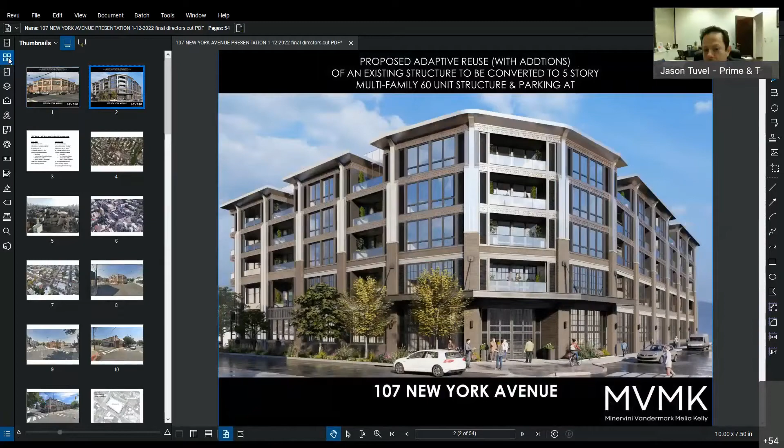There you go, Anthony. So before you, we are proposing a 5-story, 58 feet 10-inch high structure. We're proposing 60 residential units.

What you see here before you is the corner perspective of the warehouse that I had just previously shown you. The 2-story portion is going to remain. However, we are renovating it and providing a 3-story addition on top of the existing warehouse structure. The 1-story portion of the structure that I previously mentioned to the south will be demolished, and there will be a 5-story addition put back in its place, thus connecting the construction to look like one uniform structure.

So what are the differences between the two projects?

In June 2020, as Jason had previously mentioned, we presented 75 residential units. This evening, we are presenting 60 residential units. The original application had an affordable contribution for off-site housing at $450,000. That is no longer the case. We are proposing 10%, or 6 units, of affordable housing on-site, which falls in line with the inclusionary zoning ordinance that was just recently passed.

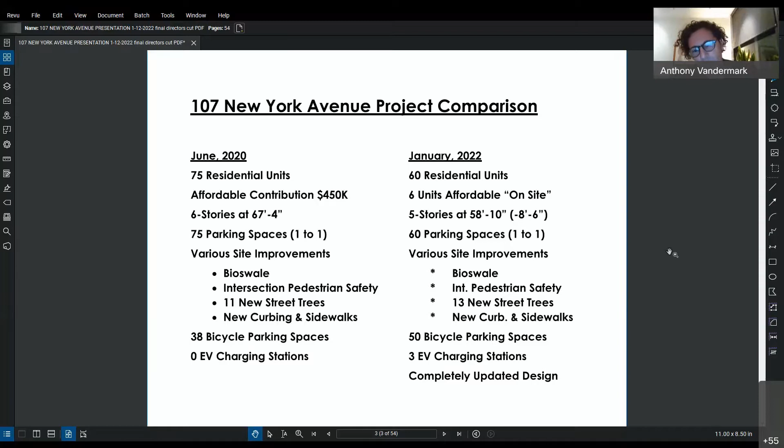And as you can see from the previous slide, we have a brand new, updated design that is pretty far apart from what the original proposal was.

The existing site is a full city block. It is 23,625 square feet, so it's a little bit over half an acre in size.

To the east, you can see my cursor here, we have New York Avenue with 140 feet of linear frontage. To the south, we have Ravine Avenue at 203 linear feet of frontage. To the west, Webster Avenue has 107 feet of linear frontage. And to the north, Ferry Street has 182 feet of linear frontage.

So the site is large. It has a definite great impact on the neighborhood. The diagonal connection street is New York Avenue, which runs down to Hoboken.

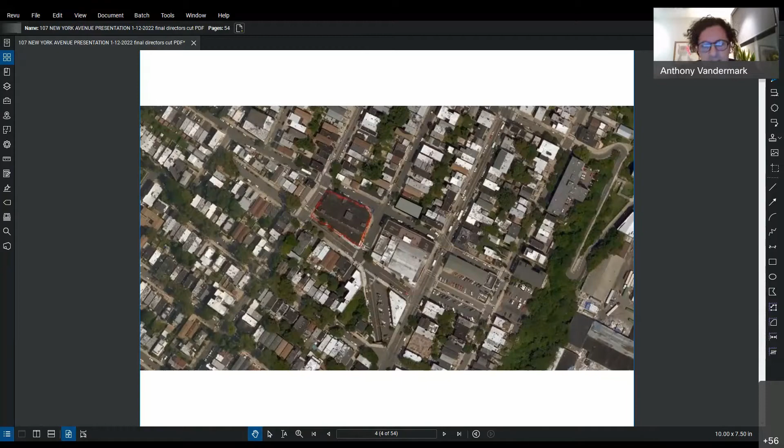This is an aerial drone shot taken this morning, as a matter of fact. The existing building directly in the center of the photograph, between the building structure itself and the remaining property on the sidewalk, is at 100% impervious.

What we're proposing tonight is a substantial stormwater detention system with a large amount of extensive green roof, also followed by the bioswales at the sidewalk level.

Some of the existing structures in the neighborhood of note: here in the foreground, you have a 3-story residential structure, which is the tan color. Directly across the street at Ferry Street, we have a 3-story and a 2-story residential structure, followed by a 1-story garage structure. Directly across the street from that on New York Avenue is the under-construction 122, 124 New York Avenue. That structure itself is at 5 stories in height and approximately 56 feet 8 inches.

So our new structure, that structure, and the trolley house lofts directly across the street will align with each other in height. To the south of trolley house lofts, you have the Supremo supermarket. And then again, in the foreground here, you have Ravine Avenue, and we'll talk a little bit about those structures.

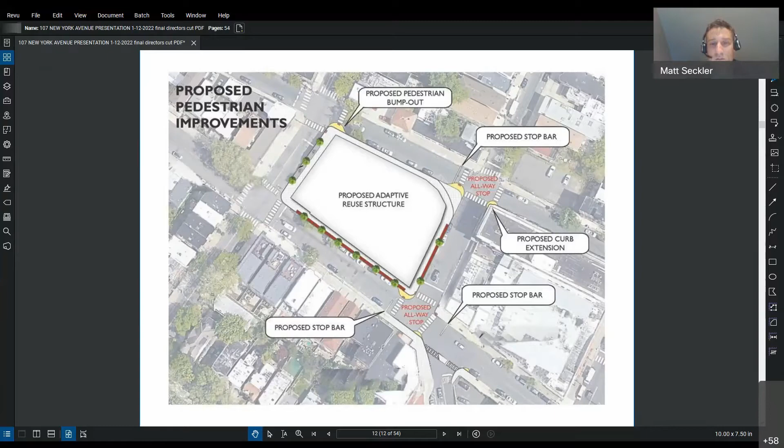The first slide here summarizes, looking at this from an aerial point of view, some of the improvements that we had previously suggested at this site during the earlier applications, and some improvements that I think would be useful that we've discussed with city staff in the past.

They include a series of pedestrian bump outs. These are what you see in yellow at a number of the corners around the project site. What this does is not only decrease the amount of distance that a pedestrian is in the roadway itself, but also provides better visibility for both the pedestrian and the motor vehicle when someone does want to cross the street. It gets them beyond the location of a parked vehicle.

So again, they get a better view of traveling cars, and cars have a better view of them, reducing the crossing distance and the amount of time they're actually in the roadway itself. We are proposing them at a number of intersections, located here at basically 3 of the corners, these bump outs being proposed.

In addition, we discussed in the past with city staff converting 2 of the intersections along New York Avenue into all-way stop conditions. Both of these intersections, the one at Ravine and the one at Ferry, currently suffer from some line of sight restrictions due to buildings built basically on the setback line. By creating an all-way stop condition, it creates better pedestrian safety as cars are no longer zipping through the area, driving over the crosswalks when a pedestrian may be looking to cross.

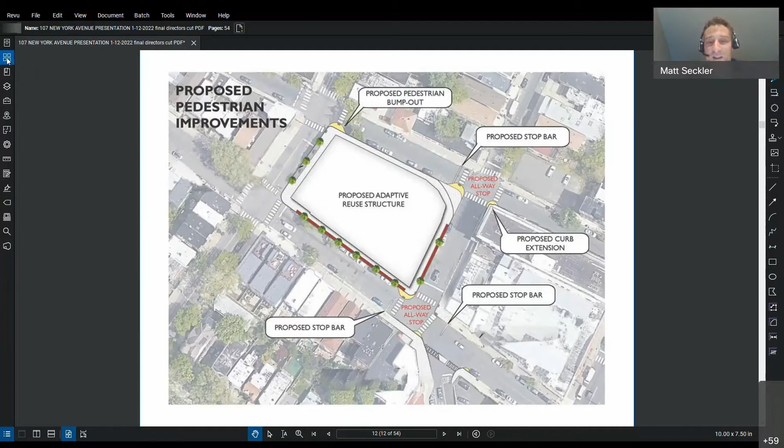I do see a comment there before about the number of trees. Anthony will show you the more detailed vision, which has, I believe, all 13 trees that he had promised on the earlier slide.

The next slide might be a comparison of the traffic impacts of a site such as this type of development. What we've done is a compare-contrast of a kind of fully operational warehouse of this size, and looked at the number of vehicles you would typically have for a warehouse, if the investment was made to operate it at normal, typical conditions. You could see the extent of vehicles, meaning likely employees or customers coming by the site, as well as the number of potential box trucks or tractor trailers that would utilize a site such as this.

I think anyone who's driven through the neighborhood at a time when the loading docks, especially on Webster, are being utilized, understands the significant traffic disruption they cause in order to access the loading docks. Clearly, a warehouse in an urban city center like Jersey City, in this area of the Heights, creates a significant amount of congestion as it relates to trying to utilize this site for tractor trailers or even box trucks.

From a proposed development perspective, we looked at what the trip generation would be for a 60-unit building. Typically, what you see during your busiest hours is a trip generation of about 18 vehicles in the morning peak hour - that's one car every 3 minutes being generated by this site. These values don't take into account the specific area of Jersey City this is located in, where there may be a further reduction of those trip generation values due to the availability of mass transit.

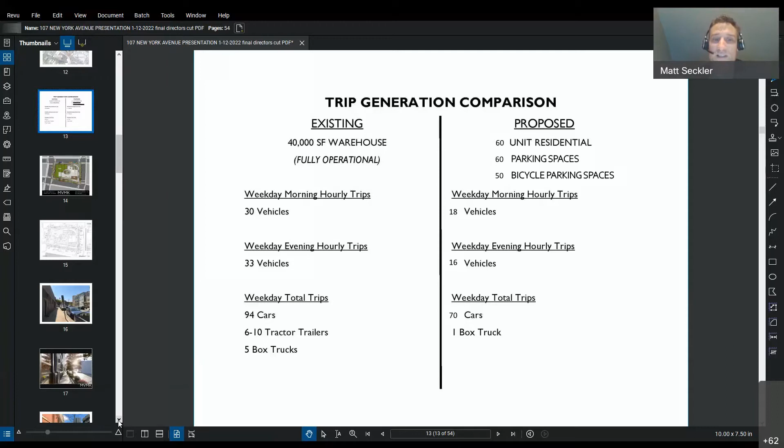Okay, and in terms of the number of parked cars on the street by the site, we're not going to be decreasing the amount of on-street spaces as a result of the construction, correct? Correct. In fact, as Anthony mentioned, there are a number of loading docks located along the Ravine side of the building, which would be able to be converted into parking spaces.

Obviously, we are removing parking spaces on the Ferry side in order to create our driveway. It'll likely be a net wash, or perhaps one extra space will be on the street than exists today, just based on how the site lays out. In addition, we are removing the very large curved curb along the Ferry Street, New York Avenue intersection, and actually creating more of a 90-degree angle helps increase the number of parking spaces along that spot. So it's either a net even or a plus one from the parking perspective.

Okay, and Jocelyn, I'm just trying to make sure I can hit every question. Somebody asked - I think what's probably going to happen is, because they're coming in kind of hot and heavy here. Yeah, I'm just trying to answer as many as we can.

In terms of the question, has there been an independent traffic study done as well? Matt, what would happen is, here we're on a county road and also a city road. We would submit our traffic report to those professionals, the city's professionals and the county's professionals. They would review our data, our report, our methodologies, and then if they wanted to conduct their own or ask us to clarify some things, they would ask us to do that, correct?

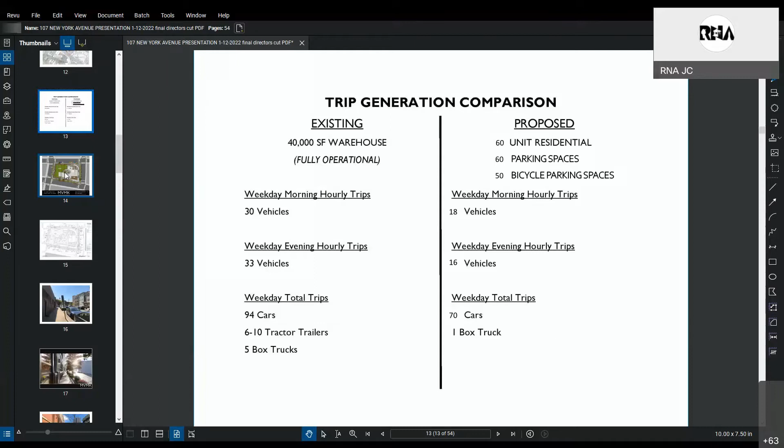Yeah, so what I was stating before is typically, and this is a state standard, you have to study something if it creates 100 trips. 100 trips doesn't automatically mean the road fails - it means it needs to be investigated. As part of this project, we actually studied the 4 intersections on our corners, so all adjoining intersections to us, we did study.

As Mr. Tuvel mentioned earlier, what we do as part of the planning board or zoning board process is when we submit these reports, the city reviewing engineer typically looks at it and says, this project's coming online, this project is still a later phase. They would provide us with additional information if it's not in our report already, and then we would have to revise our report to account for that additional traffic.

So I don't want it to be thought that once you hit 100 trips, every road in Jersey City collapses and needs to be widened. It's that at 100 trips, it creates an intersection worthy of being studied. That study may conclude there's enough capacity, it may conclude that timing needs to change, it may conclude that a traffic demand management plan should be put in effect - something that requires more investment in shuttle infrastructure, busing, biking, and things like that.

That's typically the way the city and the county have been looking at this area. So I hope that answers and clears up that question, and I'm sure there'll be plenty more. So I'm not going anywhere, and I think Anthony's got hopefully some pretty pictures to show.

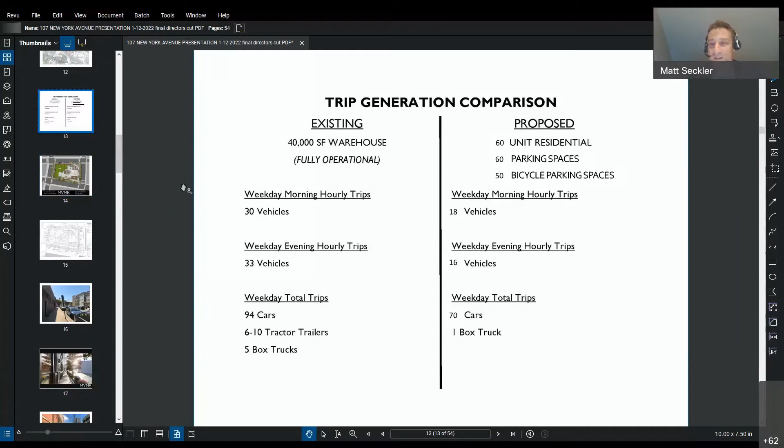Okay, let's continue. Thank you, Jocelyn. So Anthony, you want to go back to your plans? Yes, thank you very much, Jason.

Before you have a colored site plan now, and just to kind of piggyback what Matt was talking about, we have the various corner and pedestrian street improvements here. We are proposing all new concrete curbing and all new sidewalks around the perimeter of the building. Again, as previously stated, we have 13 new street trees.

We're going to try to maintain the existing 4, which is in the darker green color here. Each one of those tree planter beds, in conformance with the Jersey City forestry standard, we will kind of interconnect bioswales, which is like a rain garden. And I have some pictures of what a rain garden would look like a few slides down.

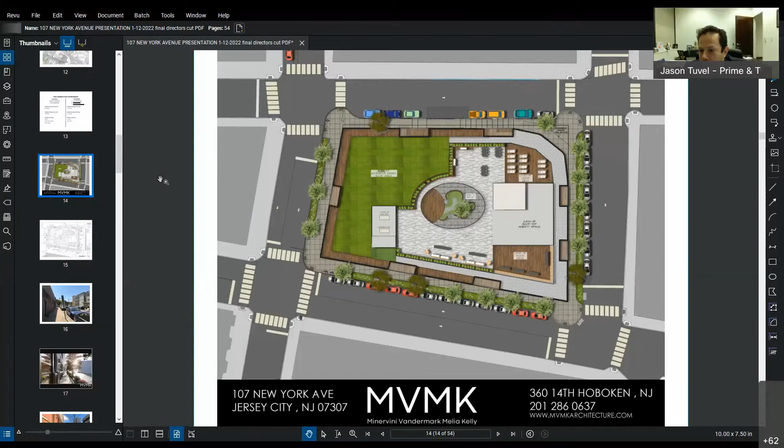As you work your way into the building now - Anthony, somebody asked, can you just zoom in your slides a little bit more so people can see? Sure, yeah. How's this? Yeah, better. Just so people can see a little more.

Okay, so working your way into the building, we're going to maintain the existing lot coverage at 96.4%, and that is 22,786 square feet of floor plan area here.

As you can see, the proposal for the new building has a center courtyard, approximately 1,500 square feet. On the left side of the upper roof, you can see 5,200 square feet of extensive green roof, equivalent to 22% of the overall site area. That's a substantial amount of green roof, one of the green elements we're proposing as part of this project.

That goes hand in hand with the stormwater detention system that Matt had previously mentioned. Also on the upper deck, we have some outdoor area with gray pedestrian pavers at 4,170 square feet. We have a small rooftop amenity space at 2,400 square feet, flanked by a 1,020 and a 1,000 square foot wood deck on the upper roof.

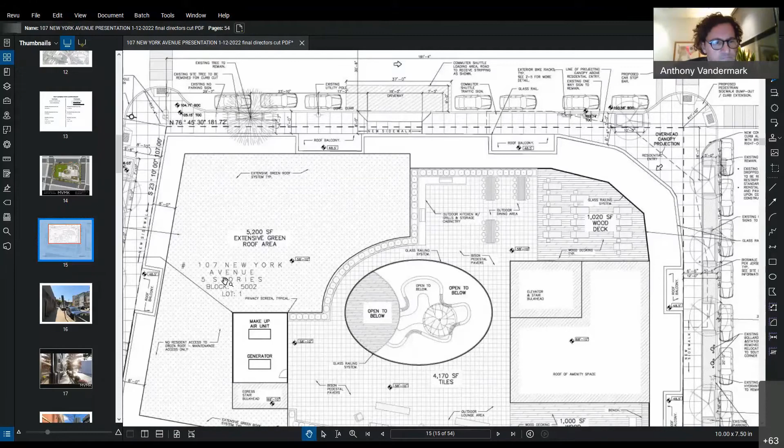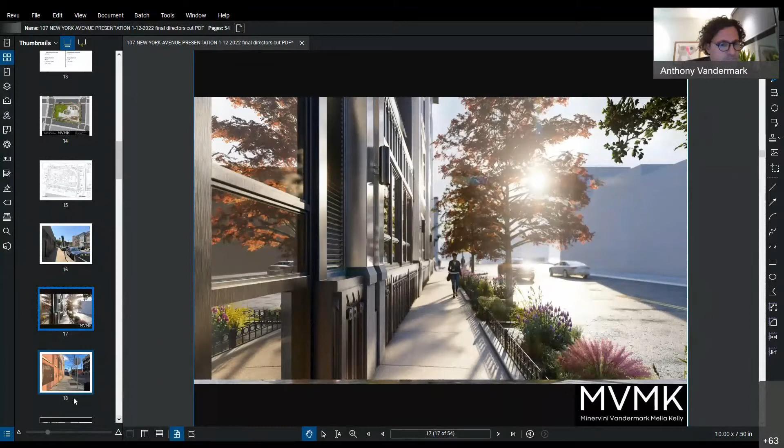This is the sidewalk at New York Avenue with the Trolley House Lofts located to the right side of the photograph, and new multifamily construction directly across the street. Looking at the street and sidewalk improvement here, there's a bioswale rainwater garden on the right-hand side, followed by the 5-story portion of the building where the existing warehouse was. We can get a look at some of the materials being proposed: a patinaed copper aluminum composite panel as the horizontal element, and wrapping the existing warehouse structure, brick masonry in the background.

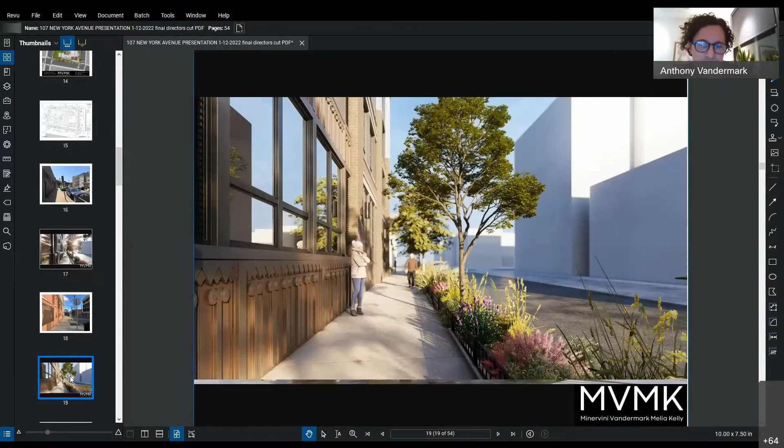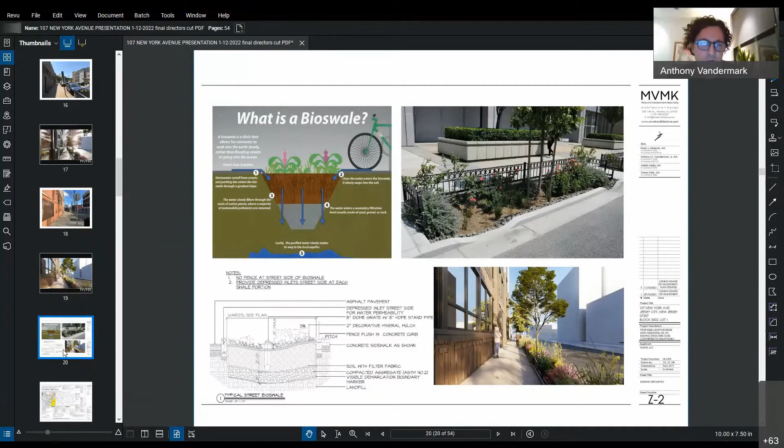What is a bioswale system? As you can see, it's a rainwater collection system that will take rainwater from the street and sidewalk, slowly dissipate it into the soil to a drainage system, and then slowly release it back out to the municipal storm system. This is another method of stormwater management that's not technically on our property, however the owner is committed to doing these sidewalk and street improvements for the neighborhood.

Anthony, I'm going to interrupt here for a minute because several people are asking who's going to actually maintain these bioswales, because it's wonderful to put them in, but if nobody maintains them, it kind of defeats the whole purpose. So who's going to be responsible to actually maintain them to make sure they function the way they're supposed to?

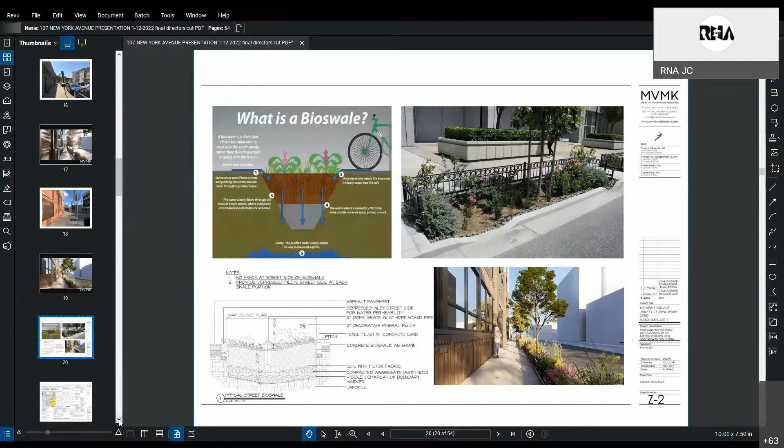This will be a management company, maintenance, the management company for the building, 107 New York, whether it being apartment and or condominium, it will be maintained by the management of the building.

Yeah, Jocelyn, I could also answer that from a legal perspective. Anthony's absolutely right, and also, because these are on the street, at least the landscaping proposed on the street, we're going to have to bond for these with the city. So we'll have to provide a maintenance bond for these, first a performance guarantee to ensure they get installed the way they're on the plans. Then after they're installed, we also have to have a maintenance guarantee for 2 years after that, where the city is able to hold a bond to make sure they stay the way they were installed. Besides that, if the city approves the project, the landscaping plan and all the plans we propose, whatever trees are there, whatever landscaping is there, all these details that Anthony is showing, those approvals run with the land, and the applicant or owner or management company are legally bound to preserve them and maintain them in the exact form that they're on the plans. I just wanted to make sure everyone understood that as well.

As from a stormwater perspective, as opposed to if the city was making improvements like they have in other areas, beautifying streets and putting these in, they don't necessarily belong to anyone's site plan. So that's when they typically fall into further disrepair, because it's on the city to come around and maintain it when they can. When it's on a site plan, having worked on a number of projects like this, whoever received the approval, or whoever ends up taking the property, that's who has to maintain it. So it's not an orphaned bioswale like you may have if the city does it on their own.

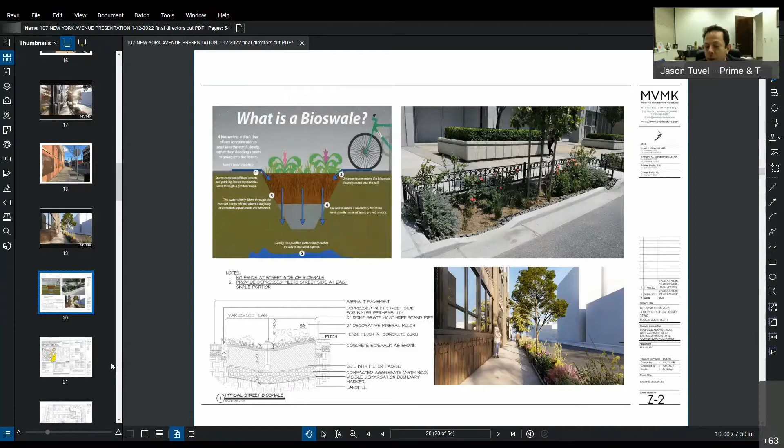Now I'm going to take you inside the building to the actual application drawings. As previously stated, we are proposing a 5-story, 58-foot 10-inch structure with 60 residential units. Of the 60 residential units, we have 24 one-bedrooms, 32 two-bedrooms, and 4 three-bedrooms.

Including this proposal, we have 50 bicycle parking spaces with 60 car parking spaces. Of the 60, we have 36 mechanical spaces, 21 standard spaces, 3 of which are electric vehicle stations, and 3 ADA parking spaces.

We are proposing a lot coverage of 96.4%, which matches the existing structure, and we are maintaining the 1'10" setback at Ferry Street. The upper floors, as part of this proposal, are at 90%. We have a center courtyard, as previously stated, at 21,326 square feet. So those are the general parameters of the project.

Taking you within the building footprint, here we have the proposed first floor plan. The residential entry and main lobby will be at the intersection and pedestrian bump-out of New York Avenue and Ferry Street. Centrally located, we have the garage entry from Ferry Street, proposing a 19-foot wide curb cut, since we're utilizing the existing structure of the first 2 floors, and you can see the circular column grid within the parking garage.

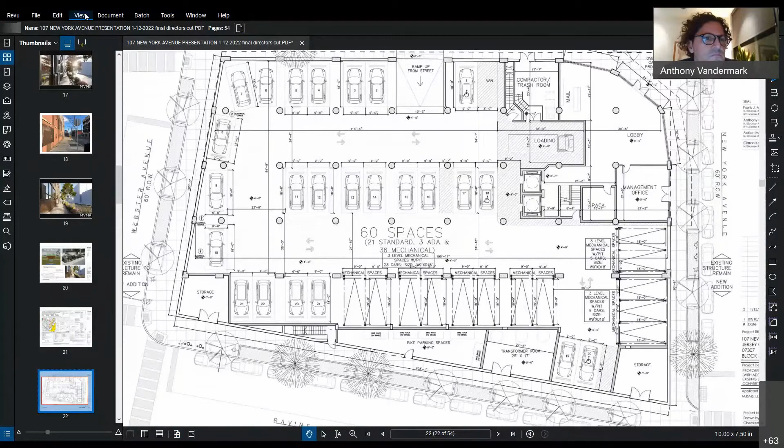Somebody asked about whether the parking is on the inside. All 60 parking spaces are on the inside of the structure, correct. There is no street parking as part of this proposal, as well as the bicycle storage.

This is a 3-dimensional rendering of the residential entry at the intersection of New York Avenue and Ferry Street. We have wrapped the existing concrete warehouse structure with nominal brick masonry. We are proposing a projected aluminum canopy with the building signage directly at the front, 107 New York Avenue. All signage and projections will be compliant with signage standards, and if needed, we will provide a franchise agreement for the projection of the canopy itself.

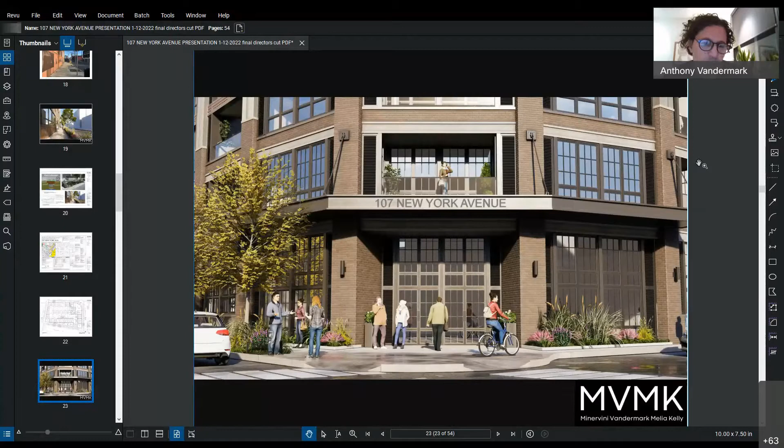We are not proposing any building element crossing over the property line. This recently has become an issue in Jersey City, where they do not want building cantilevers. So the building is at the 0 property line on 3 sides, and it's set in 1'10" at Ferry Street.

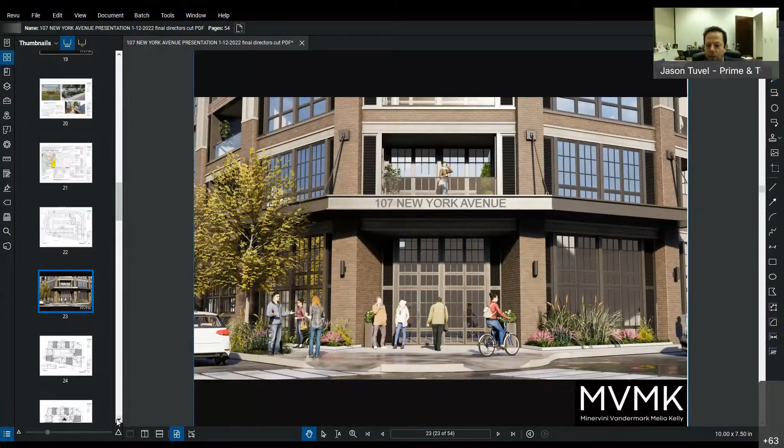Anthony, I wanted to make sure everyone was up to speed on how we're going to handle refuse and recycling. Absolutely, let me zoom back in. At the first floor, adjacent to the lobby area, top right-hand corner, we have the compactor and trash room. We're proposing a trash chute from the residential floors that will go to a compactor.

We have two methods of taking the trash out from the compactor room. We can go directly out into the sidewalk where independent carting will take it away, or the garbage truck of independent carting will enter the garage itself.

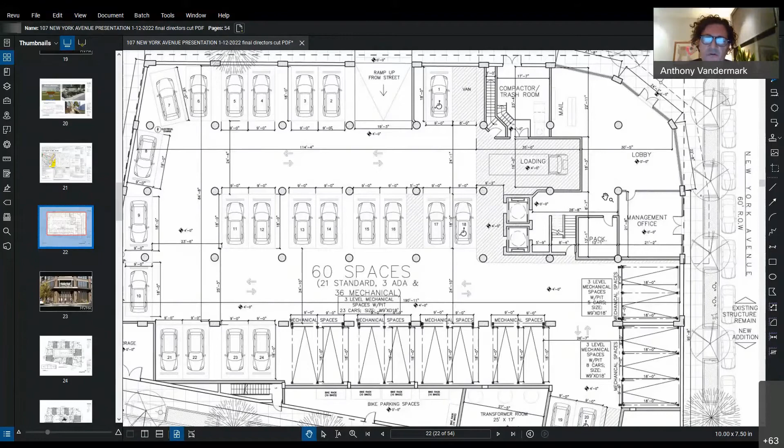We're proposing a 16-foot wide by 35-foot deep loading zone. This will not only be for garbage collection, but also for larger scale move-ins and move-outs and larger element deliveries. So not only do we have the short-term delivery zone centrally located on Ferry Street, we have a larger loading bay located within the building volume. So we think for short-term deliveries that issue is addressed, and for move-ins and move-outs of tenants, we have the larger loading bay adjacent to the lobby area.

Management will be responsible for trash and recycling pickup, correct? Yeah, that's correct. It will be independent carting and will not be city service.

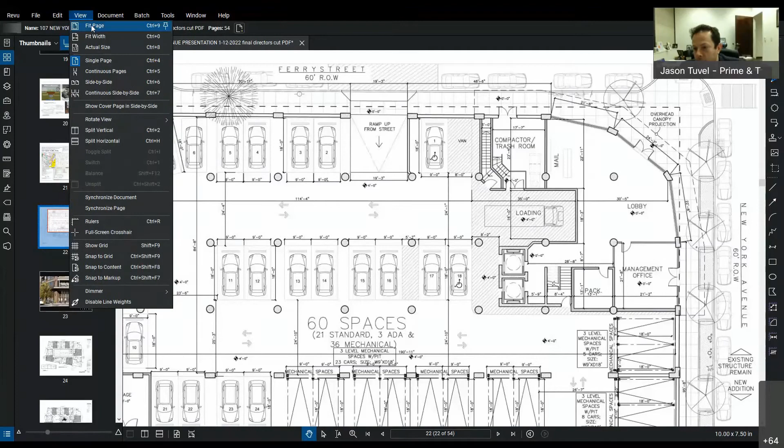Matt, from a traffic standpoint, you've reviewed the building and you're in agreement that a trash vehicle and also an ambulance, if necessary, could go within the building, correct? Yeah, and I don't know if Anthony mentioned it in terms of the clearance within the garage, but it works not only from a horizontal perspective, but also a vertical perspective.

Anthony, fire suppression within the building - obviously you have to meet all applicable codes, but could you explain that briefly? Oh yeah, absolutely. This building will be fully suppressed, including the garage. The garage will be heated, so we'll have a wet system not only in the garage, but throughout the 4 floors of residences above. There will be a sprinkler system located in the basement, a sprinkler valve, and if needed a sprinkler pump to manage water pressure going up throughout the building. The standpipe system will be located in the stairwell adjacent to the main lobby. So we are fully suppressed, and we are a fully ADA compliant structure.

Matt, you reviewed it for ADA compliance with respect to civil and parking standpoint, correct? Yeah, from an internal circulation from the garage perspective, and when we get to the design plans of the actual corners of the intersections, those will be designed to meet ADA compliance.

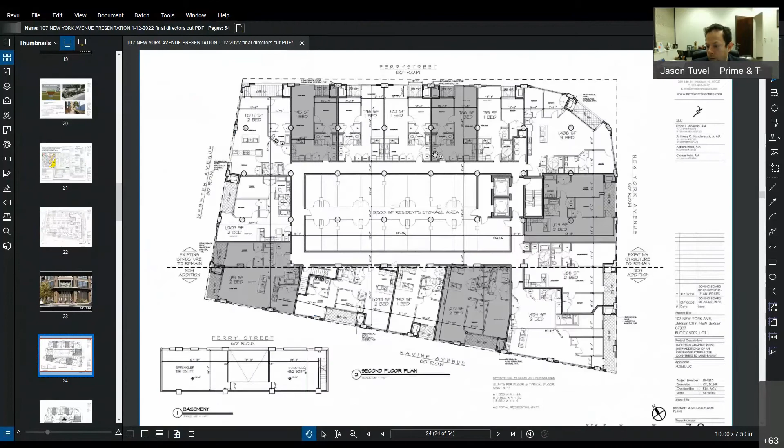So before you have the second floor plan, which is the first residential floor. Again, we are utilizing the existing structure of the warehouse at the northern portion of the building. The circular columns are located on the plan. You can see that each residential floor, 2 through 5, has 15 units.

Each floor is typical. So when you're looking at the floor plan here for the residential floors, you're looking at a single loaded corridor. As you can see, there is a 3,500 square foot residential storage area directly in the center.

However, around the perimeter of the building, where the residential units are, we have 6 one-bedrooms, ranging from 715 to 796 square feet. We have 8 two-bedrooms, ranging from 1,009 to 1,454 square feet. And in the top right-hand corner, we have 1 three-bedroom per floor at 1,439 square feet.

Each one of these residential units has its own private outdoor space, something that has obviously come about during COVID, and should we never go back to lockdown again, outdoor space has become critical and very important to a lot of the apartment buildings that we are designing currently, not just in Jersey City, but all over the state.

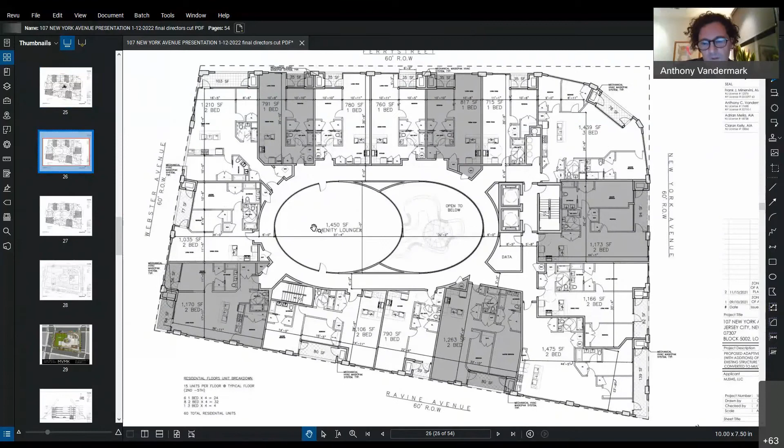Fourth floor again, very similar—15 residential units of the same unit breakdown I previously mentioned. The outdoor area is now covered and enclosed, so you have a 1,450 square foot amenity lounge that looks down into the courtyard, which is at the third floor.

Anthony, just to go back, since there's been a bunch of comments about it—the trash pickup will occur inside the building, correct? That's correct. A trash vehicle, a private hauler that the operator has to utilize, will come under the building, go into the compactor, and load the truck there. You will not be pulling out trash onto the street, right? That's correct. We have the head clearance for multiple size trucks or even a garbage truck, so it can be removed from within the building volume and not from directly across the sidewalk through the parked cars and back out to the street on Ferry. So yes, we will remove trash from within the building parking garage. Okay, I just want to make sure everyone understood that.

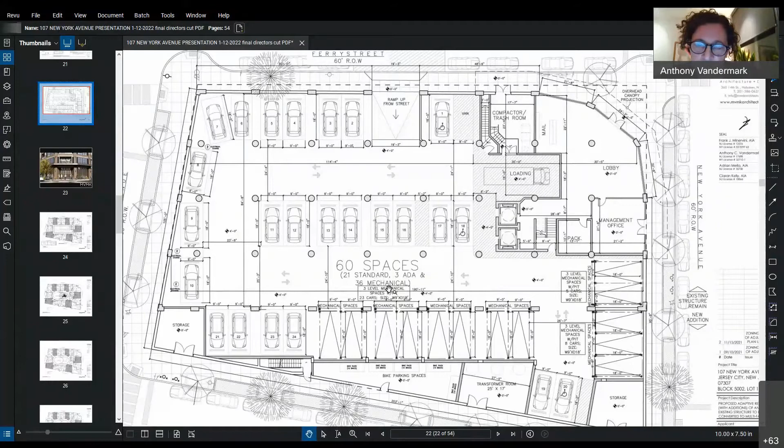Keep going. Sure. As a fail-safe, you do provide a set of double doors from the trash compactor room that open up to the exterior for whatever reason, if something needs to be taken out of that room. However, what I am basically stating is that we have the ability to remove the trash from within the parking garage. Okay.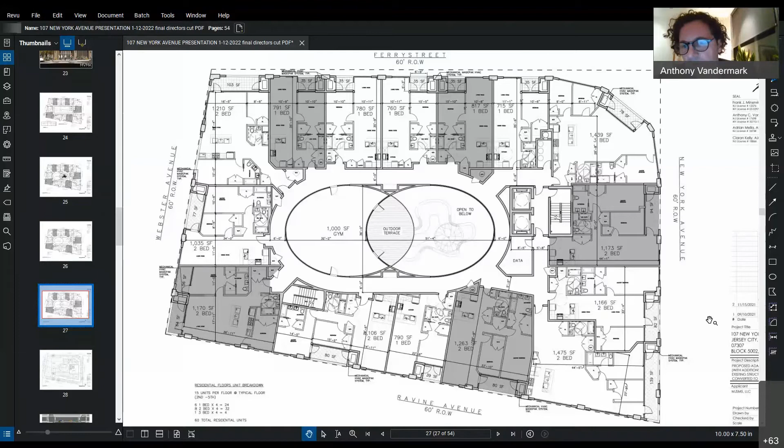Taking you back up to the roof plan, and we do have the colored site plan adjacent to this here. Again, we have various areas for outdoor space for the residents to use. We do have a 2,400 square foot amenity space, which in the black and white version you can see, adjacent to the concrete pavers.

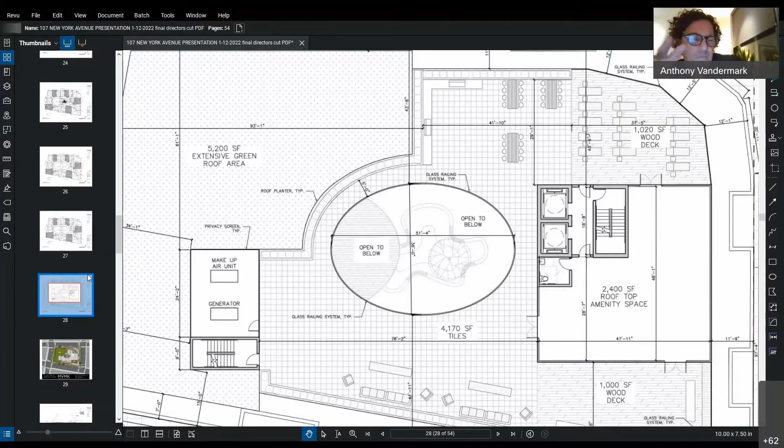This is labeled as tiles. It also has access to both wood decks at the north and the south. There is a 5,200 square foot extensive green roofing area that is unwalkable. Those roofing trays happen to be like a moss, and they do not need to be maintained—they maintain themselves. So again, we have a substantial amount of extensive green roofing area at the upper roof, and adjacent to it we have different building amenities, indoor and outdoor, and everything looks down into the center courtyard.

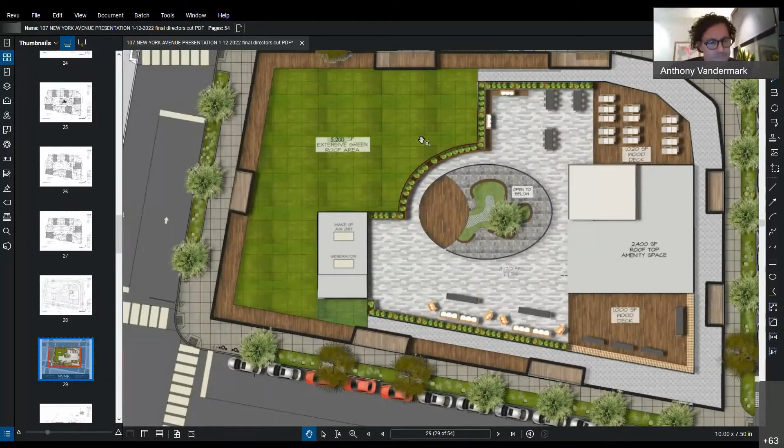Looking at the building in section, again, we have a 3-story courtyard in the center. The first floor is primarily the parking garage with some support spaces and also the main residential entry. From floor to floor heights, from the sidewalk, the first floor is at 17 feet 6 inches.

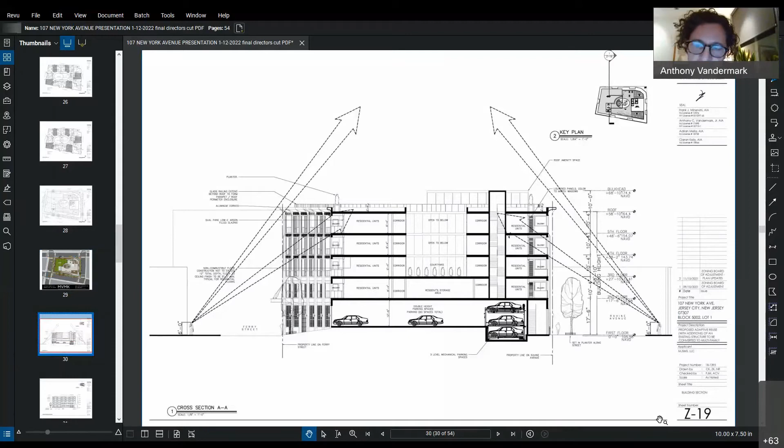That is the pre-existing height of the structure, and we're maintaining that column system and that second floor slab from the existing warehouse. So as in a previous application before you, we were basically gutting the whole entire building. We are now maintaining the columns at the first and second floor of the existing warehouse side. This is a true adaptive reuse, as opposed to maintaining just the perimeter of the building and not the interior. We are making the most of the existing structure here and utilizing it.

Again, at the first floor, we have mechanical parking, which is to the southern portion of the floor plan. As you can see here, we have 3 stacked cars, 36 mechanical parking spaces in total.

Directly above the parking garage begins your residential level. Dead center, again, is residential storage with perimeter residential units. Each unit has an outdoor space. So again, 4 floors of residential over the parking garage.

The parking garage is again at floor to floor at 17 feet 6 inches, and each residential floor is at 10-foot floor to floor. So the overall building height is 58 feet 10 inches, plus the amenity above, which is at 10 feet to the roof line. So we have 58 feet 10 inches, which is how building height is measured here in Jersey City. That's the principal building height plus 10 feet for the amenity above.

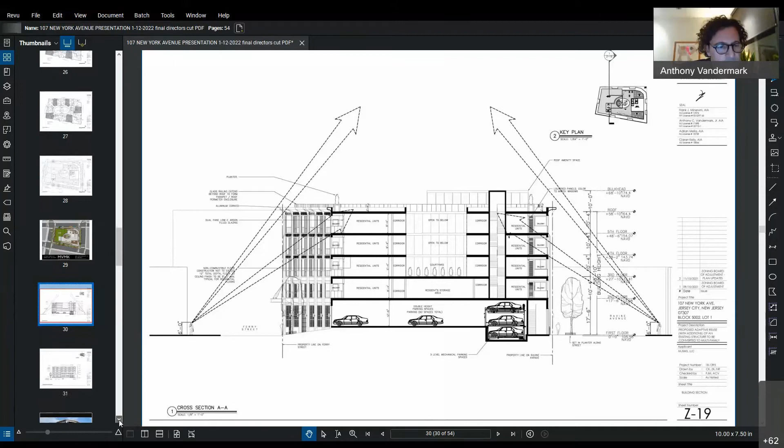Again, as previously stated, we have outdoor space breaking the building up vertically, changing the scale vertically of the building. We did remove the cornice and roof line at that outdoor space, which again changes the scale of the building and the length. And each corner, and you can almost see it here, and in a couple more slides you'll be able to see, the corners have outdoor area.

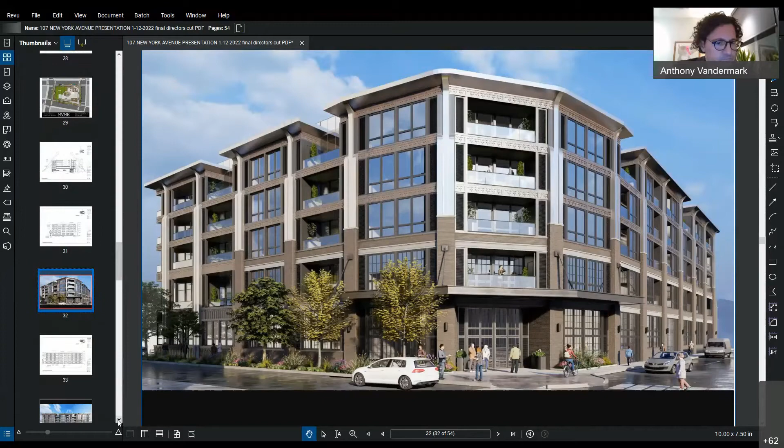If I take you to the 3-dimensional rendering, this is Ravine Avenue. Here in the foreground, you can see the bioswale component with the new and existing street trees to remain, and a 5-story portion of the building here. 2 outdoor spaces break up a 200-foot long facade here at Ravine Avenue. Again, the cornice line is broken to change the scale of what otherwise would have been a longer building facade.

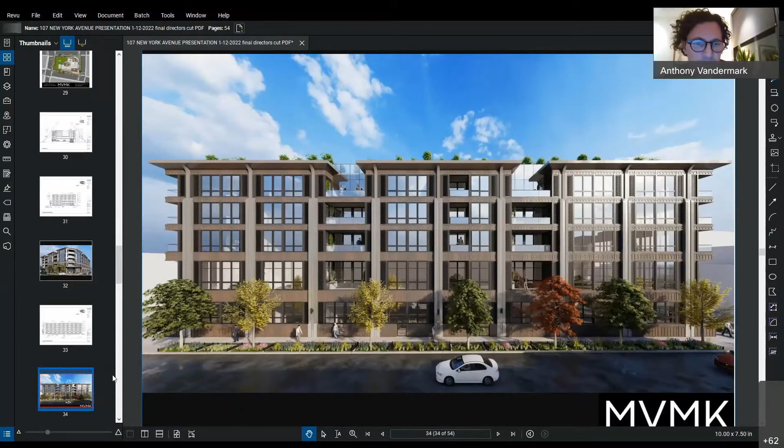Talking about the corners of the building, again, the building does not meet at a 90-degree angle at the corners. Each corner is open, with balconies floating and cantilevered at the corner, lessening the building impact at the edges. So not only do we have some centrally located outdoor space, we have corner outdoor spaces as well, and it is a design element to lessen the impact of the corner on each side of this building.

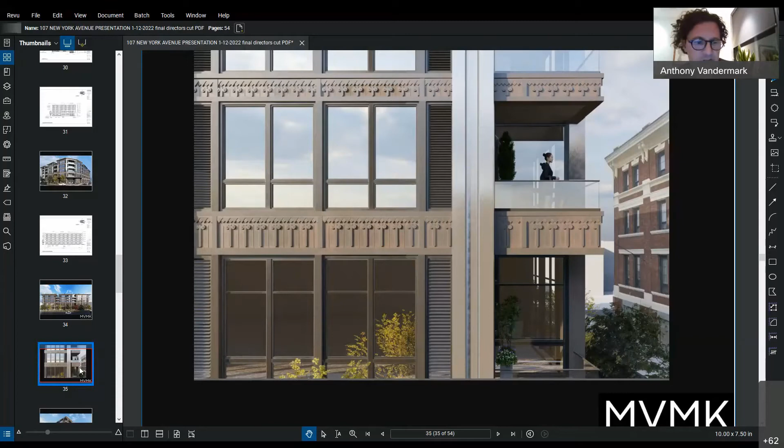This is the opposite side of New York Avenue and Ravine Avenue, again an open corner with various outdoor spaces both on New York Avenue and going back to Ravine Avenue.

So total building height, once again, is 58 feet 10 inches at 5 stories. Some of that additional height was driven by the 4 feet of height of the existing structure and the garage structure, followed by a very standard floor-to-floor height in residential construction at 10 foot 4 inches. So again, we did lessen the impact of the 5 stories vertically and horizontally here by open space.

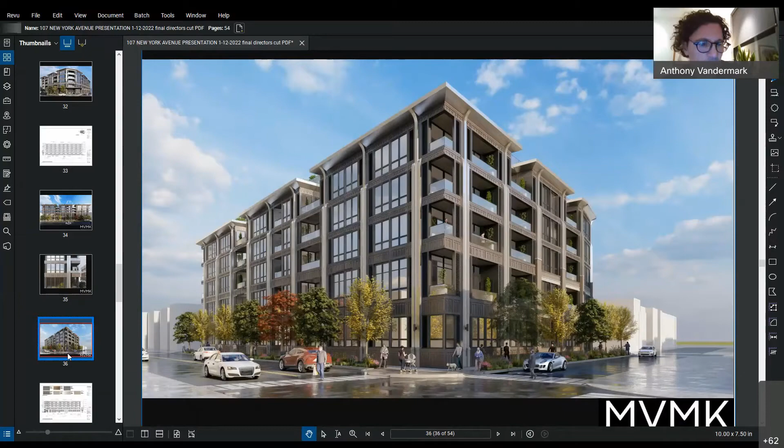As previously stated during some of the other comments about the renderings and building elevations, we have brick masonry at the warehouse structure itself. We have cast stone elements and accent banding at the existing warehouse skin, followed by some cast stone base elements at the vertical piers. The copper color is a stamped aluminum composite panel. The windows will be some shade of gray that matches the ACM vertical piers.

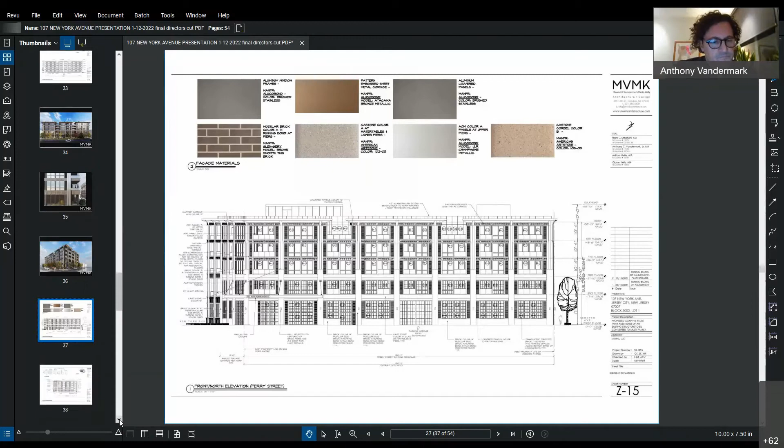So once again, in conclusion, in the black and white version, even at Ferry Street, we have a shorter facade that's again broken with outdoor space, changing the scale of the building, and by reusing the existing warehouse structure, facing it in brick, the majority of the parts of the building are in ACM panel. So this concludes my presentation for the building itself.

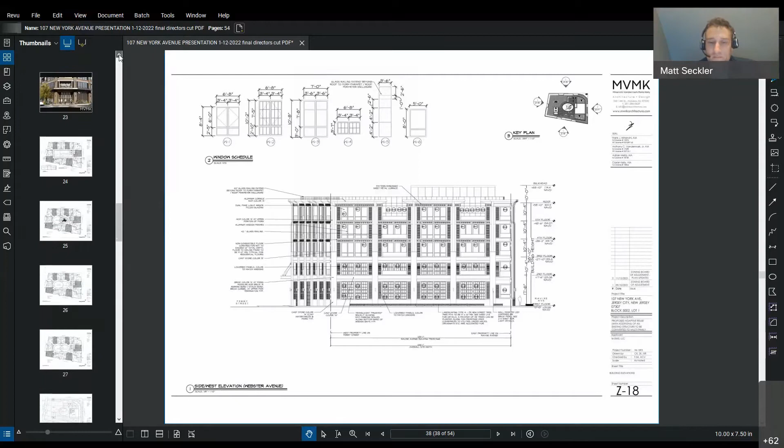Yeah, so Anthony, I'm again just trying to hit on some of the questions. We will have to comply with the new state statute regarding EV charging stations, correct, within the building? Yeah, that's correct. Matt, how many would that be for this one? It's a total of 15% of the spaces have to be EV ready or adaptable. So basically, you have to have 5% when you construct, and then up to 15% of the spaces need to be readily adaptable for EV. So we will comply with that, right? Correct. Yes.

All right, Ed, did you want to weigh in a little bit as well? Sure, I was just going to go through a little bit of the process. I saw some questions coming up, and what's going to happen now is that there is an application pending before the Zoning Board of Adjustment. There'll be a hearing scheduled, and the public will be notified, and it will likely be a Zoom meeting, not unlike what we're doing right now. We'll make a presentation similar to this. And there'll be questions from the board, there'll be comments from the staff, we'll get reports ahead of time, and then the community as well can contribute their comments at the hearing.

We are providing what we're thinking in terms of the beneficial aspects of the project. You heard Anthony talking about the flood control measures, the stormwater detention. There's a lot of aesthetic improvements. There's improvements to public safety in terms of the crosswalks and the stop signage and things of that nature. That'll all be reviewed by the municipality, by the city's engineering department, by their traffic engineers, the planning staff, and that will go back and forth a little bit before it's finalized.

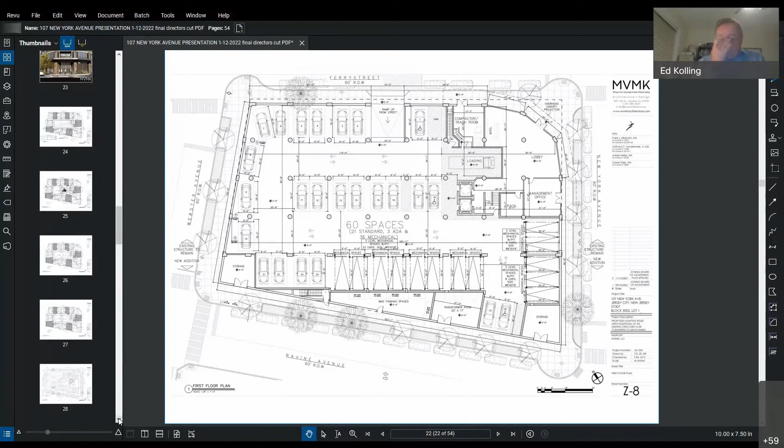So Jocelyn, thank you, and thank everybody for their patience. We tried to be as thorough as possible, but we're happy to enter into a discussion and entertain any questions that everyone may have. Okay, so let's go back to the page. Several people are asking specifically, what variances are you asking for? So let's go back to the page where the variances are listed.

Okay, so why don't you tell us what the ordinance is and what you're asking for if it's a variance? If it's as of right, there's no discussion about it. You're building as of right, but you are asking for variances. So let's just focus on the variances you're asking for.

Yeah, so Anthony, I can go through it if you want, and then ask you just to clarify something. So obviously, this is a one-family zone, two-family zone. The number of units here is greater than what's permitted. So having a multifamily building such as this with 60 residential units is a D variance, which is why we're in front of the Board of Adjustment. So I would say that's the overriding crux of the variance relief that we're seeking in front of the board, for the use of the density itself.

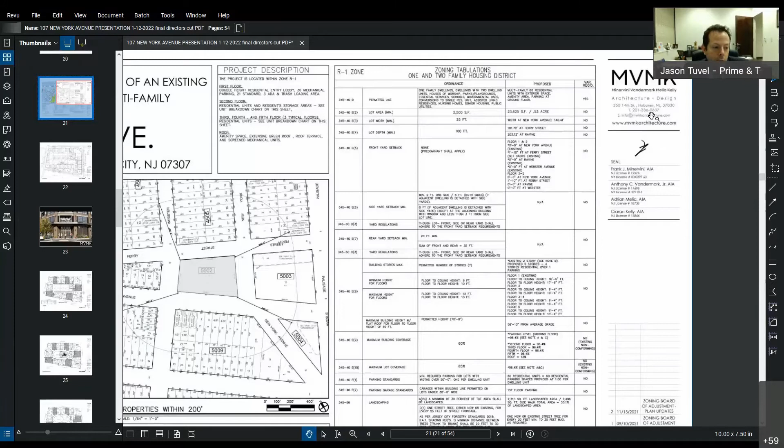And then if you scroll down a little bit, just on Anthony's zoning table. Okay, so before you do that, Jason, so just for comparison, how many units would you be able to build if you were not asking for a variance? Yeah, Ed might or Anthony might answer that question better. I can answer that question. So based on the lot area in the R1 zone, we are permitted 19 units.

Okay, so we're going to round that up to 20 just because the math is better. So basically, if you weren't asking for a variance, you could build roughly 20 units. The variance is asking for basically 40 units over that. Correct? Ed, are you in, just make sure.

I think it's hard to compare apples to apples when you're talking about a two-family zone and a mid-rise building. When you look at the lot, you can see the parcel here. It's a trapezoidal shape. I don't know if there's very many right angles. So trying to divide this into... No, Ed, trust me, I understand what you're saying. It's not like you can just chop it down the middle and go 1, 2, 3, 4, 5.

Right, exactly. I'm just trying to get for comparison's sake, if in a perfect world this lot was perfect, you could build 20 units. Obviously, we know the lot is not perfect, okay? But yes, 20 units and 60 units, there's a big difference between those two numbers. So even in a perfect world with 20 units, you're still asking for 40 units more than that. I just want the numbers to make sense to people, because sometimes when you talk about things like per square foot or per square acre, nobody's an acre of anything in Jersey City unless you're out on 440 somewhere.

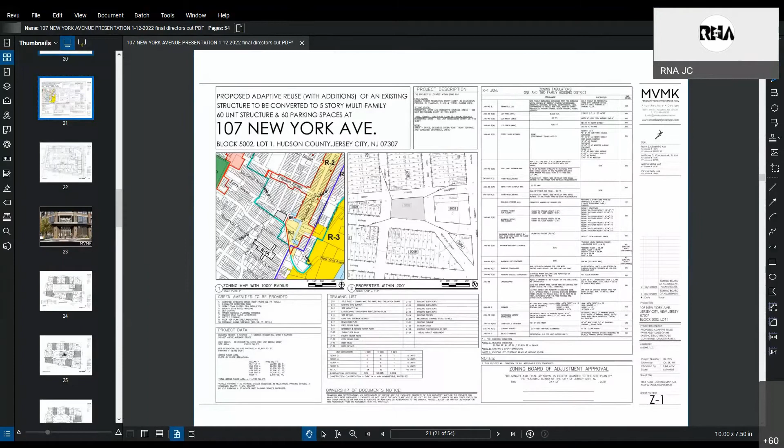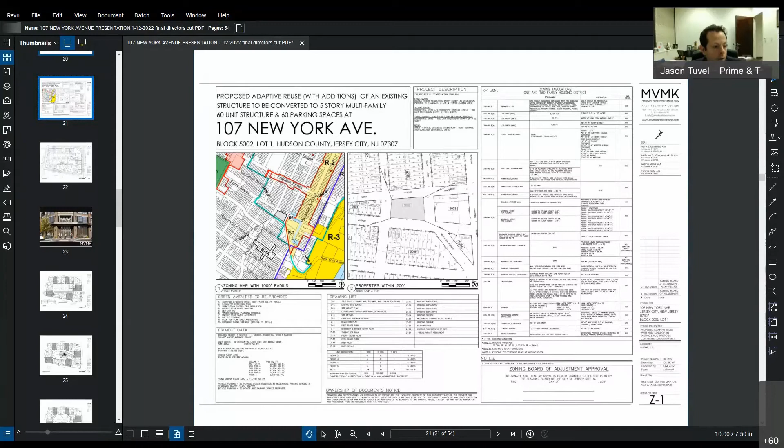All right, Patrick Moore. Jocelyn, I didn't ask any questions. Well, I asked a lot of questions, but they've been answered. Well, you asked a few questions here, so do you have any of them that you want to ask directly? No, they've been answered, but I would say, could you go back to the slide of the roof?

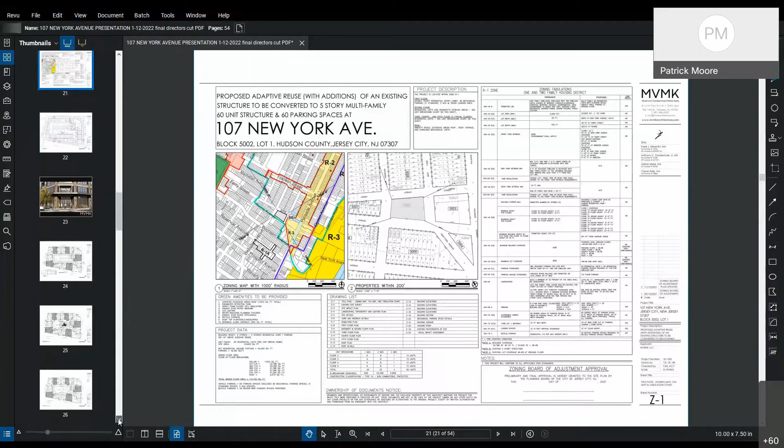Okay, Emily O, are you still with us? Yes, here. Okay, ask away. Okay, my main concerns and questions are, how will you work with the city and the community to maintain the green spaces and trees? I understand that's not necessarily the role that you would play, but how can we have assurance that that would be maintained respectfully?

Okay, so let me make sure I'm answering it correctly. The streetscape we're proposing along the sidewalks and curbs—you're asking how to ensure those are maintained properly. Right, okay. So if the plan were approved, we will have a landscape plan with all these items on it in extreme detail. That plan is ultimately signed off on by the zoning board if approved. We are then, if the application is built, bound—that approval runs with the land, and we are responsible legally to ensure it's built in that manner.

If the developer or owner does not maintain it in that manner, the city is allowed to enforce that. They could be cited, they could be compelled, but the point is they don't want to get to that point, and they know once they construct the building they're legally bound by that. We could also, using the zoning board process, in their resolution of approval, lay out the maintenance responsibilities of the applicant with respect to the landscaping as well. So we would be legally bound, as the underlying theme.

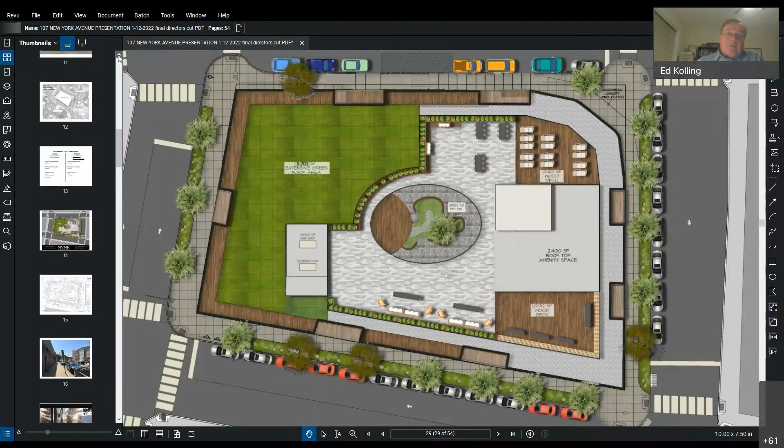The existing use, which is the industrial warehouse use, is protected. It pre-existed the current zoning, I believe it pre-existed zoning completely. So what you have today is a building that has roughly 100% lot coverage. You have no stormwater detention systems. The trucks going in and out could continue forever, and no improvements would be required to things like the stormwater, the aesthetics, the street trees, or any of the other things. So in planning terminology, the removal of this non-conforming industrial use from the neighborhood and replacing it with a residential use, which is also not permitted because it's a mid-rise building versus a two-family house, nonetheless that's considered to be a benefit because you're promoting the residential purpose and intent of the zoning. So from the planning aspect, that'd be considered a benefit.

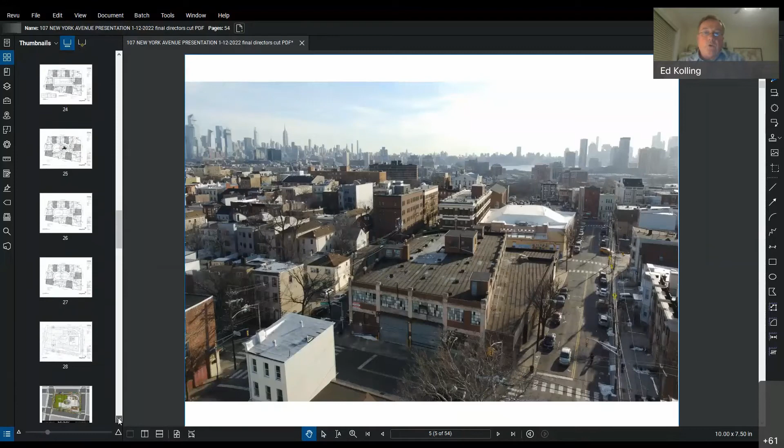And then we're looking at the other aesthetic improvements and also the provision of affordable housing. Affordable housing is considered to be inherently beneficial, so providing 10% affordable is a beneficial aspect of the project as well. Those are the types of things we'll be using in our presentation to the zoning board to support our request for the use variance.

But that doesn't answer my question about why 60 units. What benefit is that to the neighborhood, 60 units?

Well, I think the benefit is what I was saying: the removal of the industrial land use, the addition of the stormwater detention system, the aesthetic improvements, and the affordable housing.

But it's not 60 — one doesn't happen without the other. But you mean you can't give us those benefits without 60? Is that what you're saying? That's what I'm saying, yes. That sounds hard to believe. You mean you can't give us those benefits without your developer making scads of money and having 60 units? That's what you mean. I'm not saying that, and I wouldn't say that.

But nothing gets built for free. It has to be paid for. So that's the proposal, that's the application that's being presented to the board.

So in the future, then every developer will read this idea: ask for 9 stories, get the neighborhood in a huff, then scale back to 5 stories so everybody rolls over and says, well, this is better than the monstrosity they asked for previously. So this will be a strategy moving forward. We're here long term, you're here repeatedly — this is not my first rodeo watching these buildings — but for the people who live in this neighborhood, we are here long term. So we have to think about what happens at the next meeting and the next building that wants to keep putting in more and more people. That's why we're all wasting our Wednesday night listening to floor after floor described to us in minute detail, so you guys can tire us out and we roll over and let you do what you want. That's our concern. Thank you.

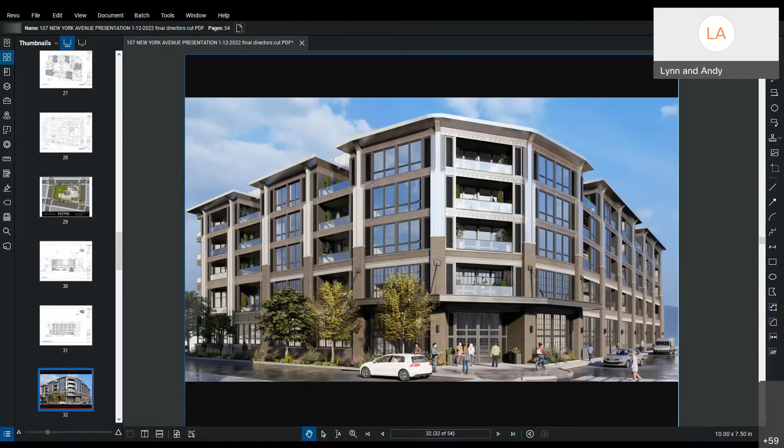Okay, any response to that before we move on? I didn't hear a question in there, so no, I don't have a response.

Okay, Trisha Ocone. I think my question was already asked by Lynn. Thank you, okay, just want to make sure.

Ken Montalbano. Is Ken still with us? Let me see if Ken's still on my list. Hello, everyone. Yes. Okay, there you are.

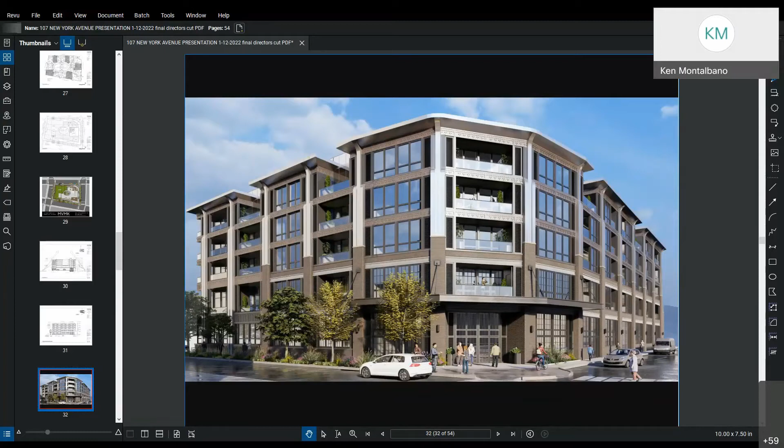Okay, yeah, so I had a question. Are these units expected to be rental apartments or condos for sale? Yeah, Ken, it's a good question. I don't believe the developer has made that decision. I think somebody answered it very well in the session — to be honest, I don't remember who it was, but the answer was proper, which is typically it's built for either, and then market conditions at the time would dictate the type of building the developer would do.

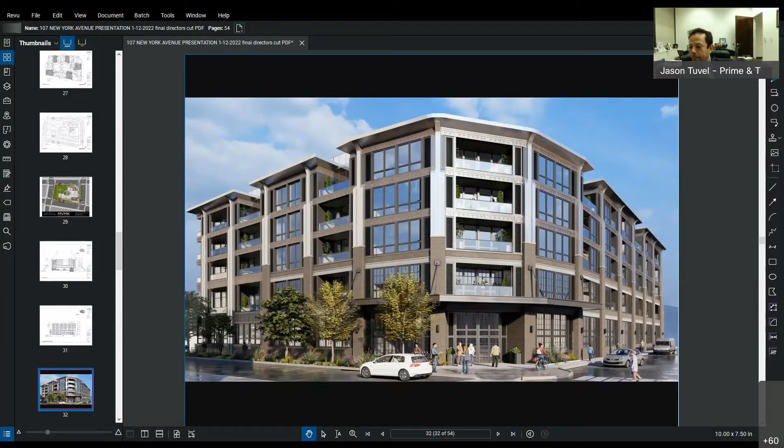Okay, next up is Michelle Meagher.

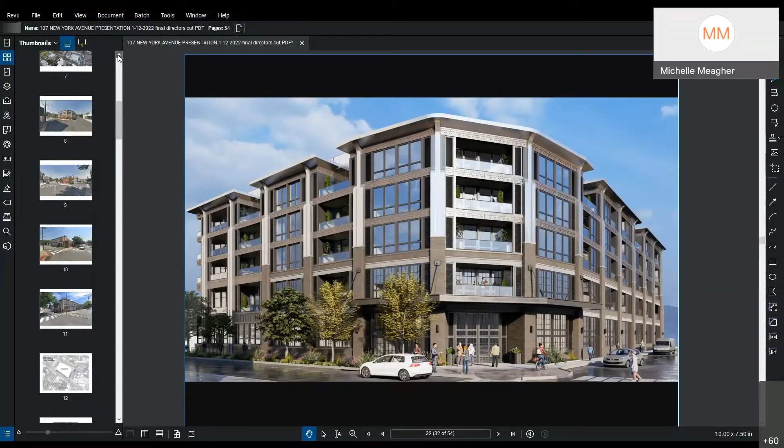Yeah, hi, so I had one question but a couple of concerns. The fact that you just said you don't know if it's going to be rental or condos — then you can't really factor in the impact on parking, because I'm on Ravine, literally right on the corner, directly across. I'm a homeowner, so I'm sure everyone who's a homeowner can agree it's an eyesore, and anything that raises the value of our property is welcomed. But my neighbors next to me, those 2 units, have 5 cars with 2 parking spots, so that's 3 cars additional on this block. If those are rentals, you can't guarantee you're going to have 3 guys living together with 1 parking spot. That's going to impact parking.

On top of which, if you add the 4 stop signs on the corner, this intersection is a nightmare to begin with. It's only going to get worse. The traffic, you underestimated. I work from home, I hear it all day long. It is constant. I don't think you've adequately factored that in, in addition to adding probably 200 more people to a 2-block radius between what you're proposing and the building on Ferry.

And then my neighbors can't be on this call, but they have the roof, and this is going to destroy their view, and that is going to decrease the value of properties, especially along Ravine. So I don't personally see something at that size to be a benefit to the community. What it's zoned for, I would be totally down for, but 60 units seems really excessive.

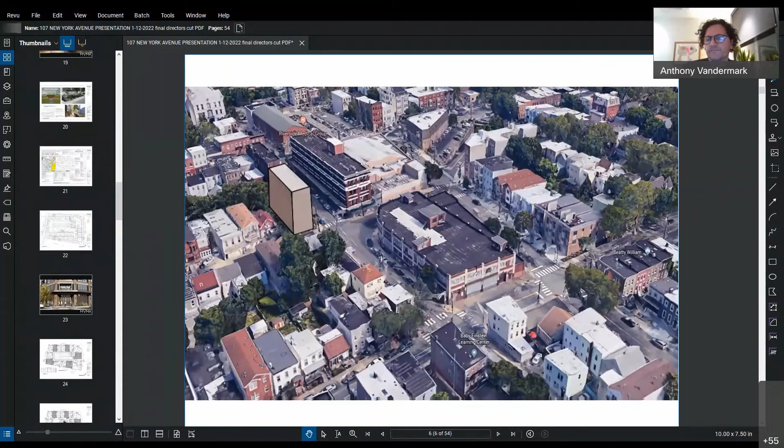If not, I'll just keep moving down the list. Yeah, I'll just say as a global comment that we're listening to all the concerns. I didn't have the benefit of being part of the prior process, but we're listening to all your comments. This is the first time, me personally, that I'm hearing them as the project attorney now, and we will take them all seriously, speak together, and communicate with you going forward. So I just wanted to make that clear, that we're taking all these comments under consideration and very seriously.

But Jason, just to point out one thing that Nicholas is saying that I think is an extremely valid point. It does make this conversation a little bit of a why bother, when you're still being sued. It's like the lawsuit is still there. So how genuine is this conversation, when if the lawsuit goes your way, none of this means anything, because you have no incentive to do this or anything if in fact you do win the lawsuit. Now obviously if you don't, then it's a different story. But it just seems like if there was some legitimacy to your concerns and you really wanted to work with us, why is the lawsuit still there?

Yeah, no, I understand the question. And again, I'm not handling that aspect of it. I'm just doing the development part, which is the part that comes before you.

But let's just put it this way, I understand the comments that you're providing based on that. I'll speak to the client about it, but I don't have enough knowledge of the lawsuit to speak to it. That's all.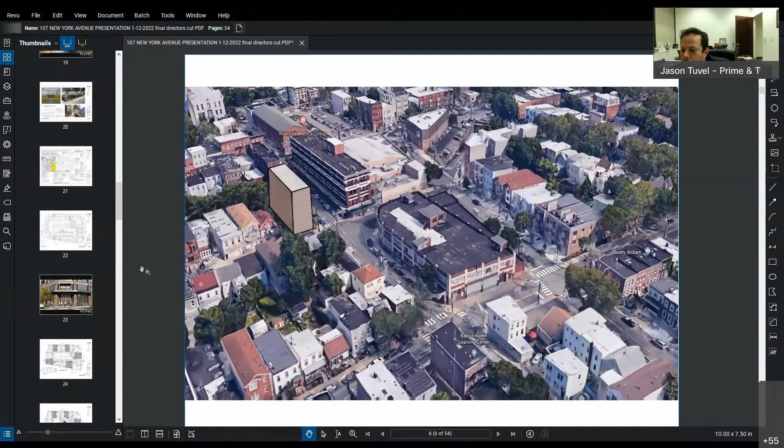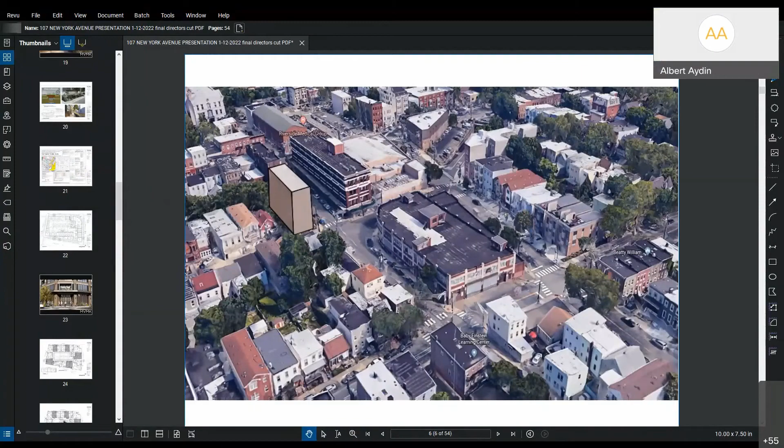Hi, can you hear me? Yes. Great, and thank you for all the time too on this. I don't mean to dwell on the trash pickup. To give you a little bit of context too, for the developers and architect on here.

I've lived in these buildings before, these kind of buildings, and I'm a little confused still. If you're saying that the trash pickup will happen inside, are you saying that's an option, or that's actually going to happen, or that's a requirement? Reason is, with these buildings, a lot of times if they're going to be using dumpsters or large bins, a truck is going to have to come in, park itself, make a whole lot of noise between the hours of like 10 and midnight. I live on Ferry Street, a few feet away from here, and I appreciate that right now trash comes by, they pick up the bins quickly, and they keep moving. It's very minimal noise, I understand that happens, but when they're parked there for 10 to 15 minutes picking up and putting down these dumpsters, that's a lot of noise, and I'm a little concerned about that. I'm a little confused as to what is the requirement, or if what you're showing us is just an option and it's totally up to the management company to decide. So I just want to get that clarity here.

Yeah, so Anthony, would we be able to... it seems like that's a concern in terms of having the operator utilize the door that goes to the exterior, as opposed to picking up the trash on the interior, if I'm understanding the question.

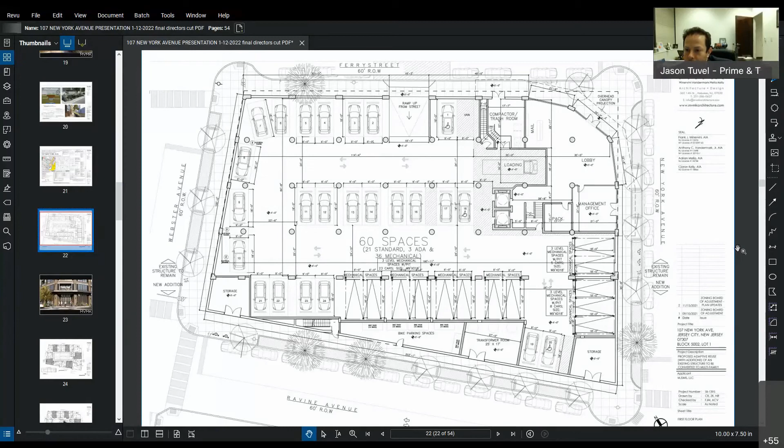Is that exterior door just like an emergency door that you have to have in a trash room? Is that the reason for it? You always would want to have a secondary access point in a compactor room.

So yes, it acts as a secondary door. Should the project get approved, and I don't want to speak out of turn here, but you could make it a condition of approval that all trash and recycling will be removed through the garage itself and not by the sidewalk. That from a building design standpoint is plausible, and that door could be restricted as an emergency door only, used in limited circumstances.

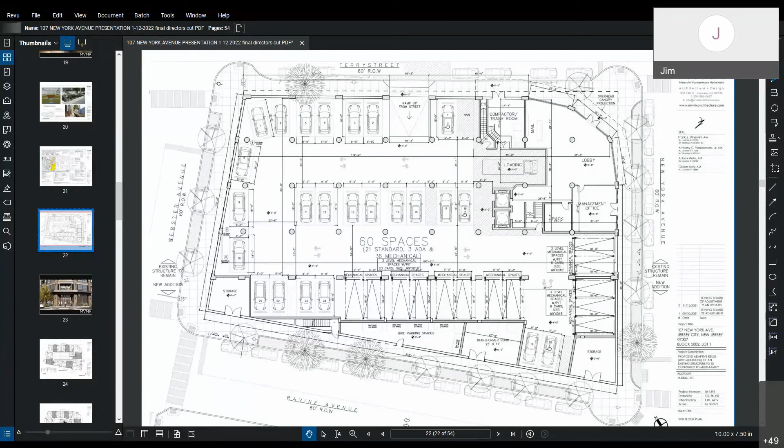Could I ask a question? Sure, go right ahead. Hi, I'm Jim. I live in the Trolley House Lofts, and I was just curious regarding what measures you would be taking during the construction and demolition process to ensure the safety of the buildings around it.

I live right across the street from the huge development that just went up on New York Ave, and when they were drilling into the concrete to put down the foundation, it really shook our whole building, frankly. I know there's a lot of buildings around that building, and it's a pretty big footprint, so I'm just curious about what's planned around that.

Yeah, I'll take this one. We're very fortunate that this building is kind of an island onto itself, and also we're utilizing 2/3 of the existing building structure and foundation. So we're only proposing new foundations on about 1/3 of the site, and here up on the Palisades there won't be any pile driving, so there won't be any vibration.

You're doing the foundations on the southern portion of the site itself. As far as protection, I'm thinking that the owner, developer, or general contractor is going to have to line this property in scaffolding on all four sides, and then provide protection screening and work inward and outward. Again, I think vibration will probably be at a minimum here, just because we're utilizing 2/3 of the existing structure.

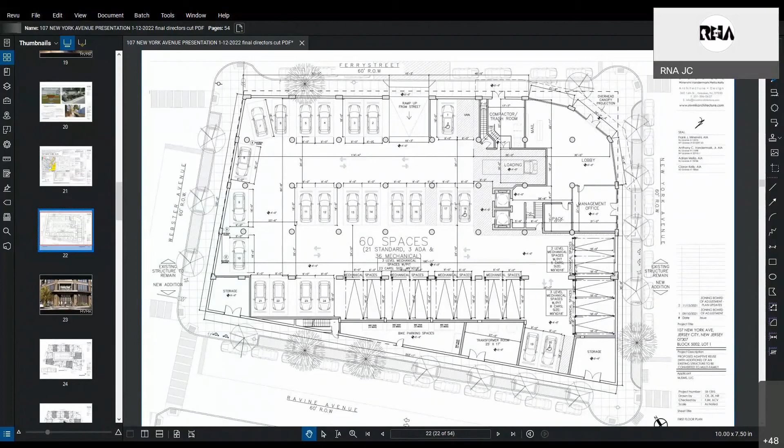Does that answer your question? I guess that's a yes. Jim, you had a question? That was just me, so thank you. Oh, okay, all right, I didn't know. I just saw a hand up. Yeah, are you still here? Jocelyn, I think somebody asked a question in the comments.

Becky Hoffman asks, do we have a date for our board application yet? The answer to that is no. We wanted to have this meeting before going back to the planning department, and the planning department also wanted us to meet with the community as well. So we don't have a date yet to answer that question.

Okay, Deirdre, do you still have a question? Hi, hello, yes, just briefly, the question would be to follow up on aspects of the lawsuit. I'm curious if you are allowed to present another proposal to the zoning board while you have an existing lawsuit with the previous proposal on the same site. It seems as though two plans for the same site are possibly gaming the system or creating a potential conflict, and I'm not sure how the zoning board approaches that, if anyone could address that. Thank you.

Yeah, really, I'm sorry, I know no one likes this answer, but I really can't comment on the lawsuit aspects of it. One, because typically you don't comment on things during litigation, and two, I'm not handling that, so I really don't know the ins and outs of it. So again, I'm sorry for that answer. I know nobody wants to hear that, but unfortunately, that's what I'm going to have to say.

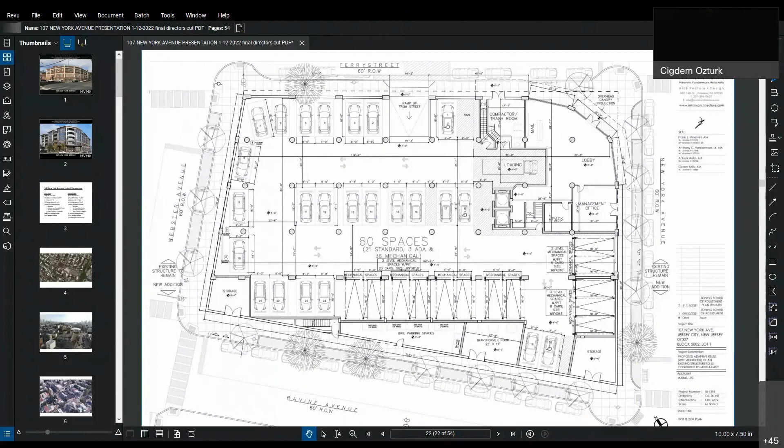And plus we have the Sawyer building now, which is new, and then there's another one they're building in front of Sawyer. So with the light rail, I really cannot imagine the traffic on that road with all these multi-apartment buildings. That was my comment. Thank you.

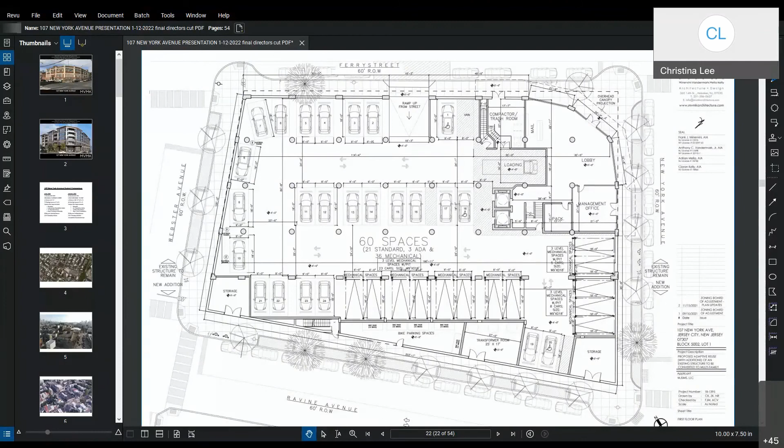I can't answer that this second, but I think there were some other questions we needed to come back with follow-up. I will do that as well. Okay, thank you. Sure. Okay, Christina?

That was me, Jocelyn. Oh, that was you. Okay, yeah, I couldn't tell. Sorry. Okay, anyone else?

I'm curious, how practical is the mechanical parking from a daily usage standpoint? Matt, do you want to?

So this carousel mechanical parking model is used - I've actually worked on a number of projects with it. It's been used in Hoboken, it's been used in Hackensack. The company, I think, has their local office in Hackensack. This is a very reputable style of parking that's being used more and more as you're trying to reach certain parking supply numbers in urban infill development where you have limited space. This becomes one of the preferred methods, this kind of carousel style parking.

There's a number of videos online. If you search carousel mechanical parking, you'll be able to see how it operates. But the user, the parker, is the person actually using it. There's no attendant or anything.

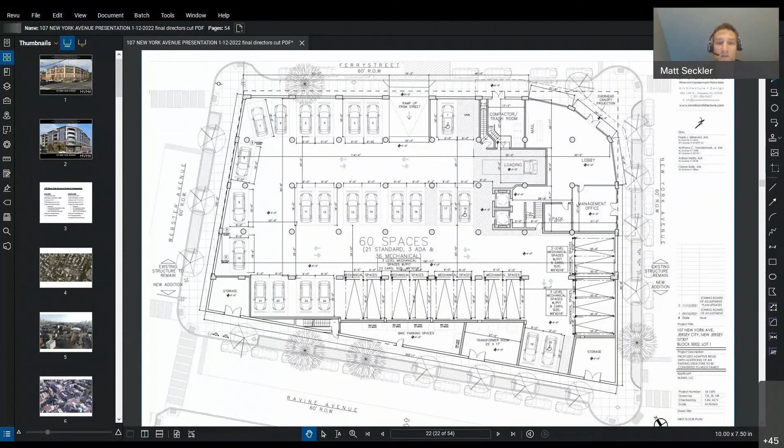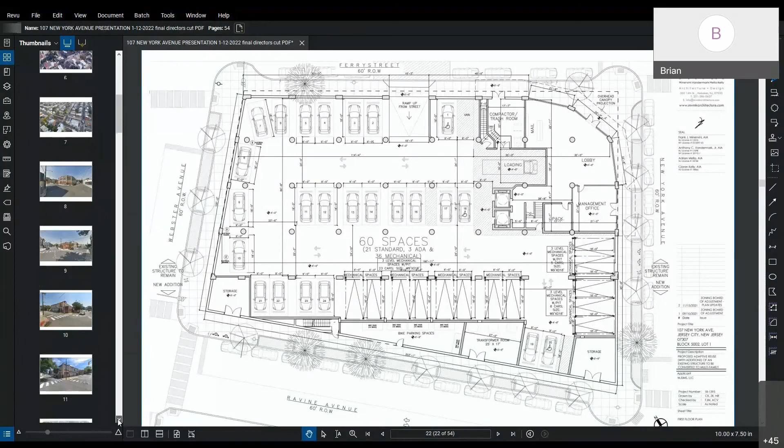And then I have a question about the traffic study from New York Ave. I live on New York Ave, 125. I was curious about the stop sign - where it's currently located, if you were to cross Ferry coming from New York Avenue, it's set back pretty far, so it doesn't provide adequate sight for crosswalk safety. You have to actually travel through the crosswalk to get to a safe viewing angle. Have you looked at that as part of the traffic study, maybe to extend the curb on the north side of Ferry as well?

That's exactly why we proposed making that intersection an all-way stop. Right now, what you said is exactly what we've witnessed. In order to see around those garages, you have to inch up over to the crosswalk because cars are coming, legally, at 20 to 25 miles an hour down Ferry. If it's an all-way stop, the car would stop on Ferry, visible from where the stop sign is located now, so you wouldn't have to worry about cars coming through at that speed. You reach the stop sign, look, see whether that person got there first or you did, and do your typical alternating traffic at the all-way stop sign.

Great. Thank you. And I guess it's just a broader question, in keeping with the theme of the evening as well.

I bought my house here to escape the high rises. We lived in Manhattan, Brooklyn, Queens. Now we live here, very happy in our quiet neighborhood. But as somebody who lives in the shadow, or future shadow, of this potential building, I just don't see why it's appropriate. I know you cited Trolley House and 122, but there are more units in this proposed building than in those two buildings combined. This is going to look like a spaceship dropped it off. I'm just curious why it's appropriate for this neighborhood, other than drainage, etc.

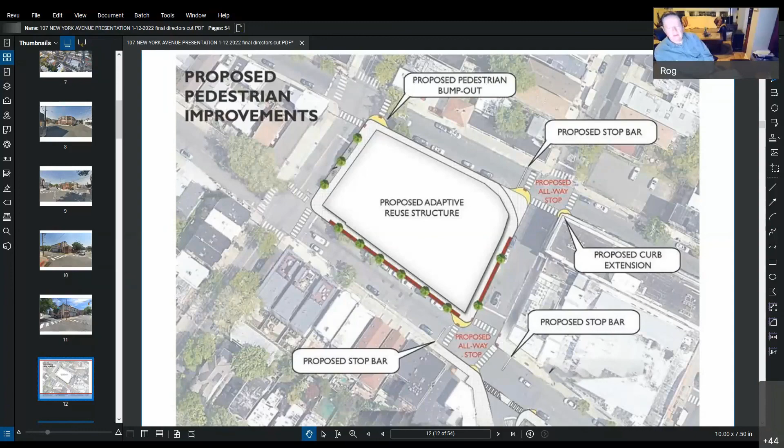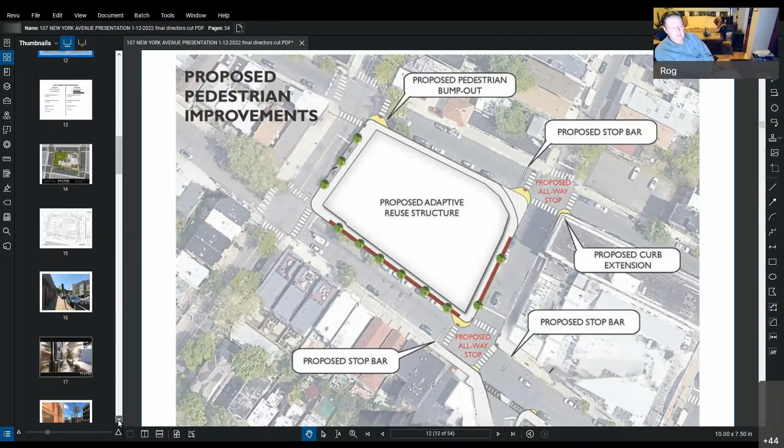Is it going to be open so that we have to look at the cars in the garage, or is there a plan to put frosted glass? It's a good question. Anthony, can you answer that? Yeah, absolutely. The parking garage is going to be enclosed. It will have translucent windows. This is something we agreed to on the previous application. So you're not just staring at the face of cars, but there will be glazing there, so you'll be seeing somewhat of a glow. It will also be mechanically ventilated, so this is not an open air parking garage.